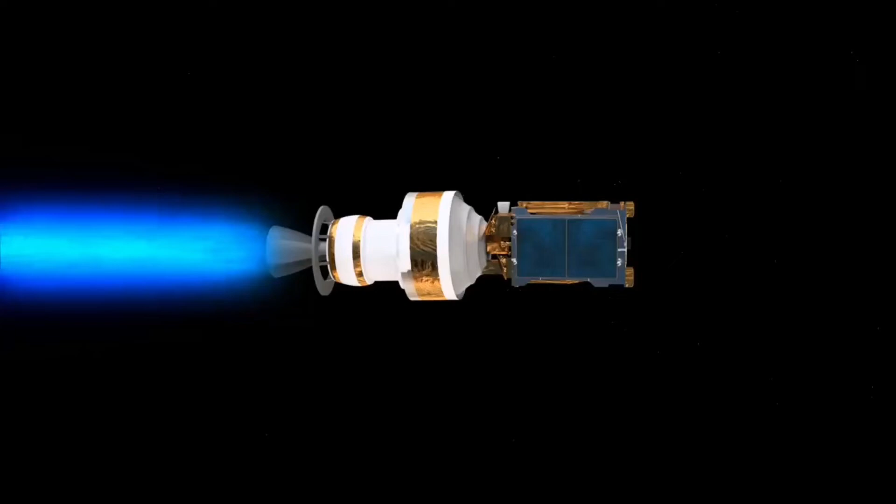Hello, good day. So on this part of this video, I will be discussing with you the basic concepts related to geometric geodesy as preparation for geodetic control networks. So as we proceed, let us first know what a geodetic control network is. So how is geometric geodesy related to geodetic control networks?

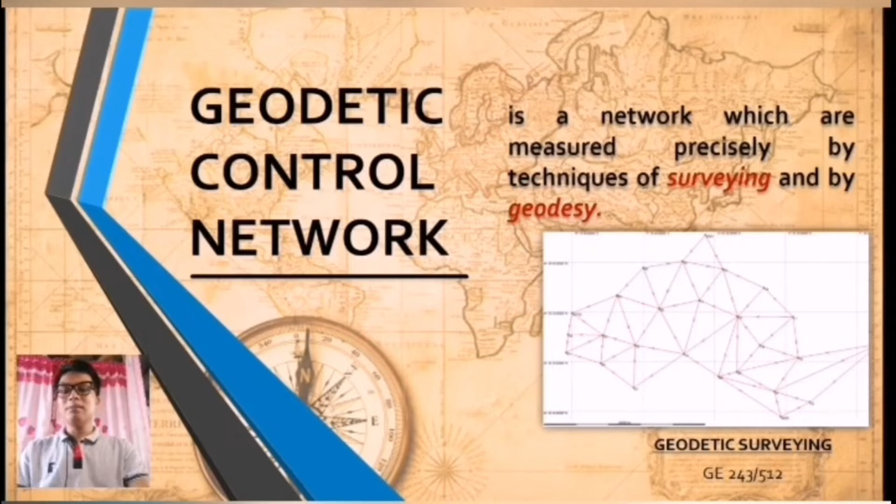So geodetic control networks are often called control networks, geodetic control points, or reference points. So it's a network which is measured precisely by techniques of surveying and geodesy. So in that part, a network is measured precisely by techniques of geodesy. So geodetic control networks provide us with control points given in the same reference system or coordinate system.

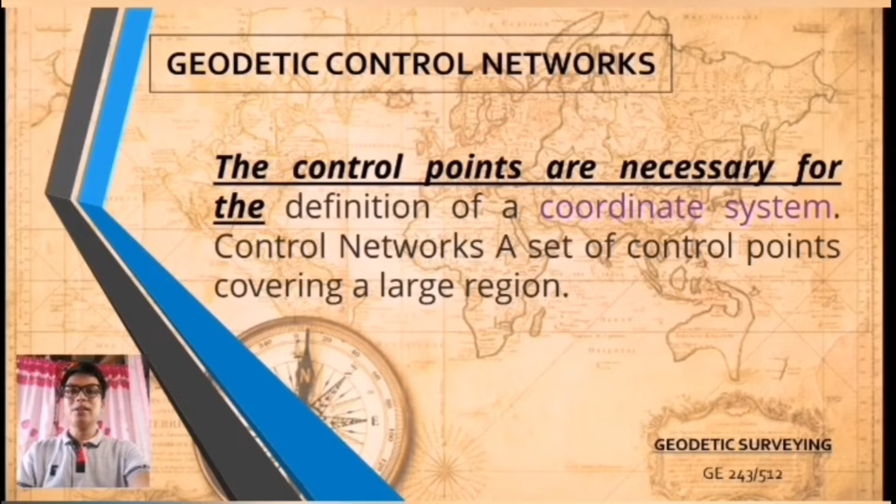So the positions, or so-called coordinates, of these points are determined using geodetic observations in an appropriate frame. So these geodetic observations include the branches of geodesy. So these control points are necessary for the definitions of coordinate systems. So control networks are a set of control points covering a large region. This coordinate system consists of two, which are horizontal coordinates and vertical coordinates.

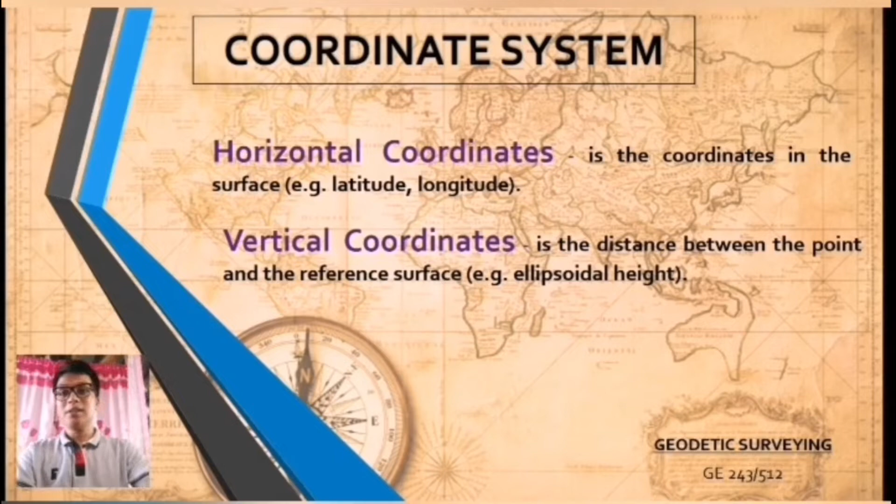So these horizontal coordinates are coordinates on the surface, such as latitudes and longitudes of points, while vertical coordinates are the distance between the points and the reference surface, or the ellipsoidal height. So that is what we call a 3D coordinate system. Now, where does geodesy come in?

So first, let us recall, geodesy is the discipline that deals with the measurement and representation of the Earth, including its gravity field, in a three-dimensional time-varying space. So geodesy relies on trilateration, leveling, satellite observations, or gravimetric observations. So since geodetic control networks are points, reference points, we need geometry, right? Hence the word geometric itself.

So geometric geodesy is concerned with describing locations in terms of geometry. Since the shape of the Earth is ellipsoidal, not a perfect sphere or flat, coordinate systems are one of the primary products of geometric geodesy. So that's why geometric geodesy is very important in preparation for geodetic control networks. So I hope that you understand.

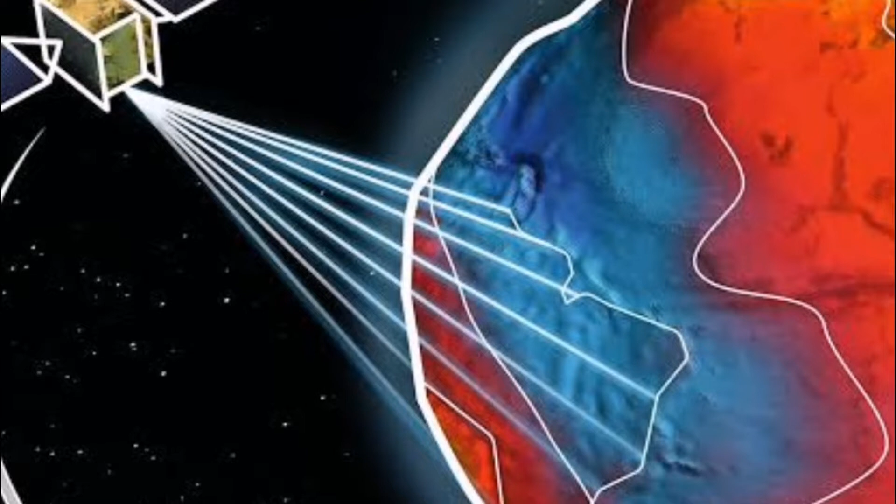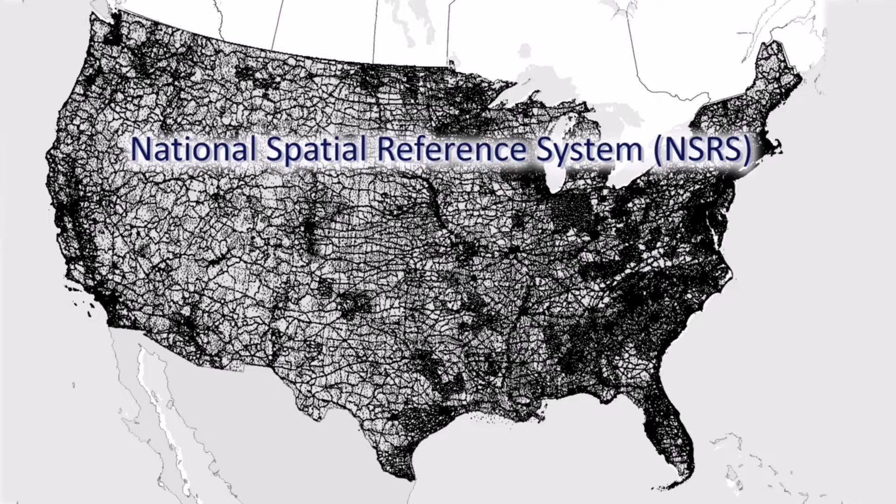When beginning most surveying and mapping projects, you are trying to find the coordinates of an unknown point or points. So you need to start at a place where the coordinates are known. Such starting points are called your project control. Using project control that has coordinates from the National Spatial Reference System, or the NSRS, ensures consistency with other surveys and maps that also use the NSRS, so that when maps are created, property boundaries determined, and roads planned, everything matches up.

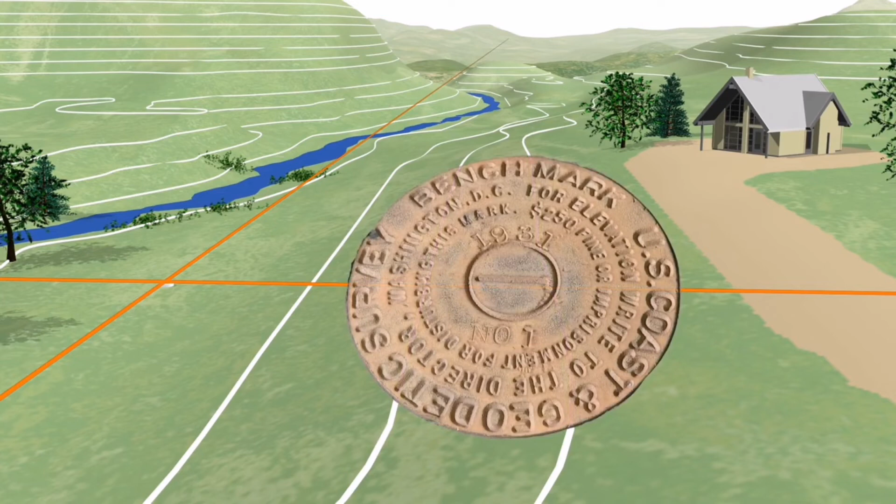For decades, surveyors relied primarily on passive control marks to tie into the NSRS. Passive control marks are usually some physical object, often a metal disc or rod installed in the ground. They are called passive because they can't alert you to their movement, and their coordinates may not be checked and updated for years or even decades. Over 800,000 passive control marks were set across the country, generally by the federal government, to build the NSRS.

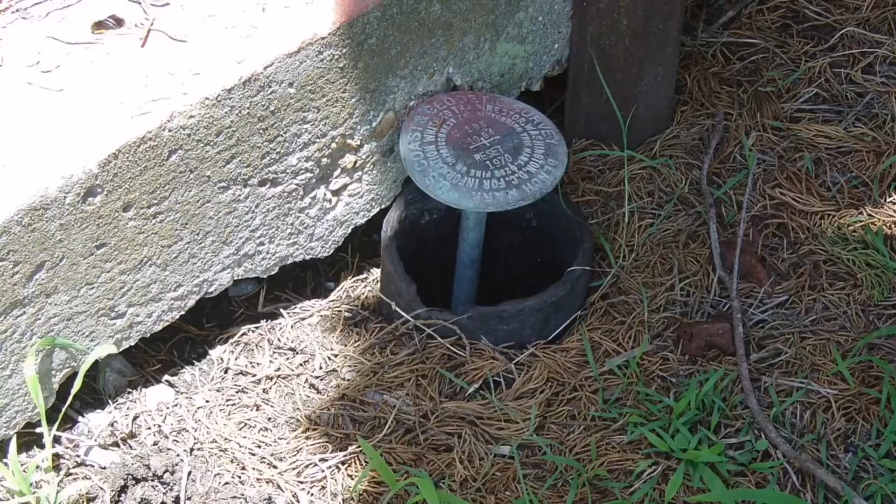Over the years, however, many marks have been disturbed, damaged, or destroyed. The coordinates for many others are no longer valid due to earthquakes, subsidence, or other crustal motion. For these reasons, you should always check a mark's coordinates before using it as control, and there may not even be a valid mark in your area of interest.

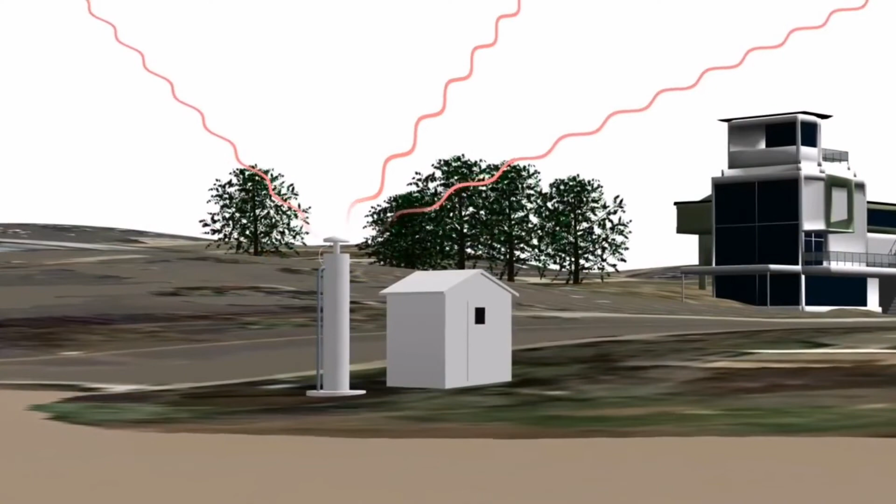Today, instead of marks in the ground, people are using permanently installed Global Positioning System, GPS, and other Global Navigation Satellite Systems, GNSS, receivers as active control. These receivers are called active because they are always collecting satellite information which tells us if they have moved, and if so, how much. You can utilize active control by accessing data from a nationwide network of continuously operating GPS reference stations, or CORS, to compute an up-to-date position in the NSRS.

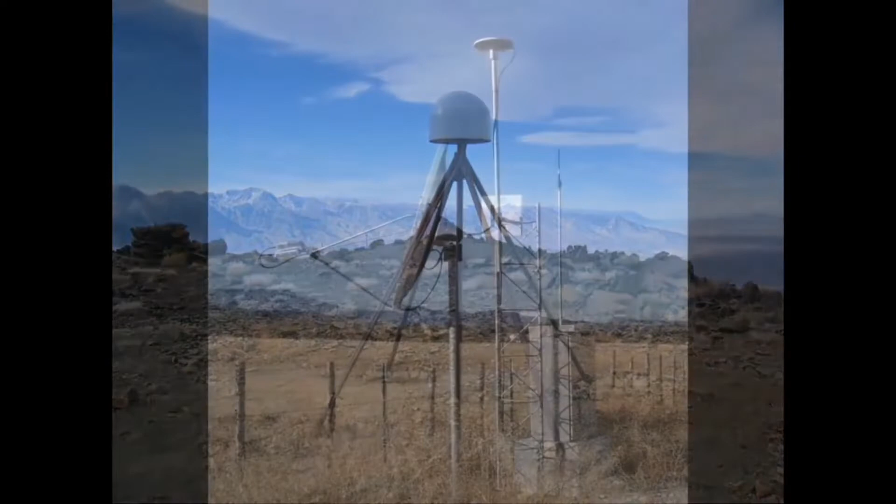CORS act as your known points to help you establish coordinates on unknown points. Each CORS includes a highly accurate receiver that constantly collects radio signals broadcast by GPS and other GNSS satellites, allowing the coordinates to remain up to date. NOAA works with many partners to manage a network of several thousand CORS, which are located in secure areas to ensure their longevity. CORS coordinates, accessed via the Internet, are validated daily and updated in the event of land movement.

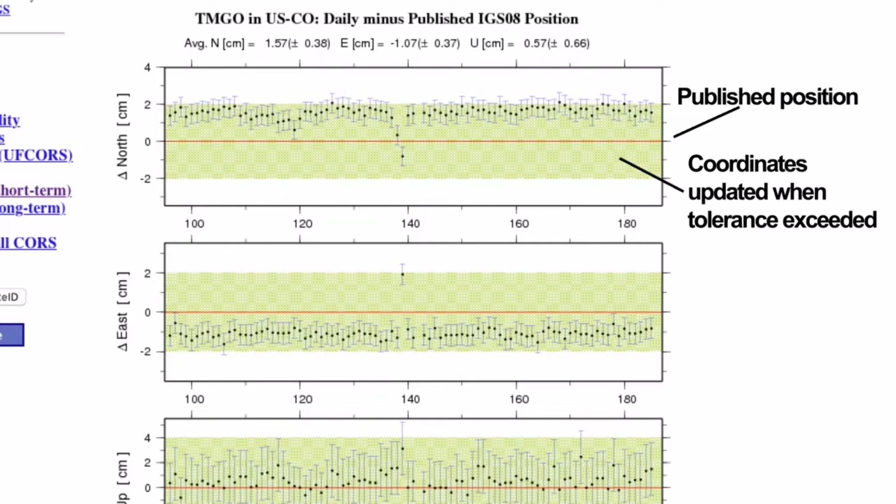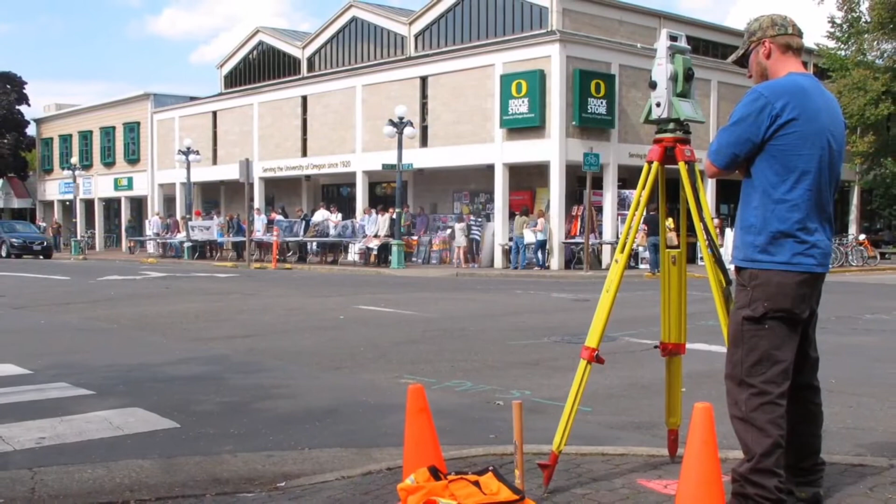This is a very different approach than passive control, where coordinates may not be checked for years. Using passive control requires you to start your survey from an existing physical point, which you must find and occupy with surveying equipment. Conversely, users have no need to physically visit a CORS site, and in fact can use CORS from hundreds of kilometers away from their survey site.

While passive control marks will continue to play an important role in the mapping community, making use of CORS and GPS allows you to keep up with this dynamic and changing world and start your survey almost anywhere.

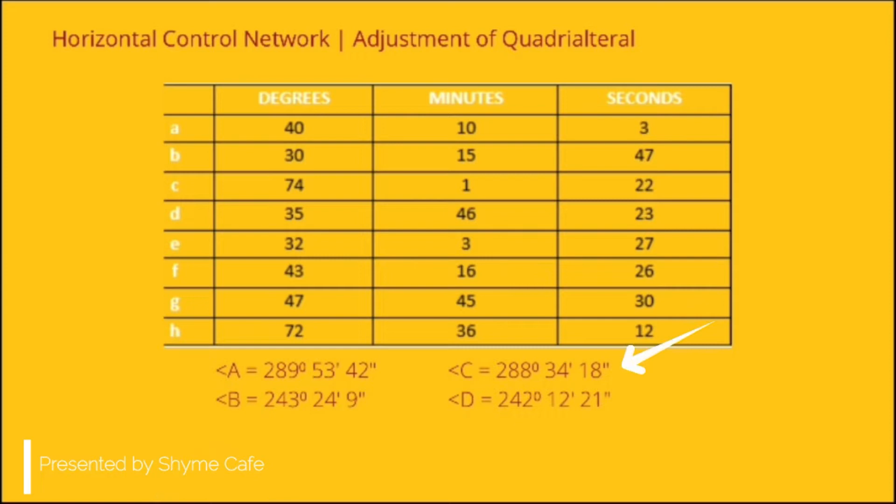So we have here the solution. The first adjustment is the station adjustment. In this adjustment, we need to make sure that the sum of the angles about each station should be equal to 360 degrees. If the sum of the angles, including the interior and exterior angle, is not equal to 360 degrees, correction is to be applied by determining the difference between the sum of the measured angles and 360 degrees. The resulting difference is then divided by the number of angles about the station, and the correction is to be added or subtracted to each angle.

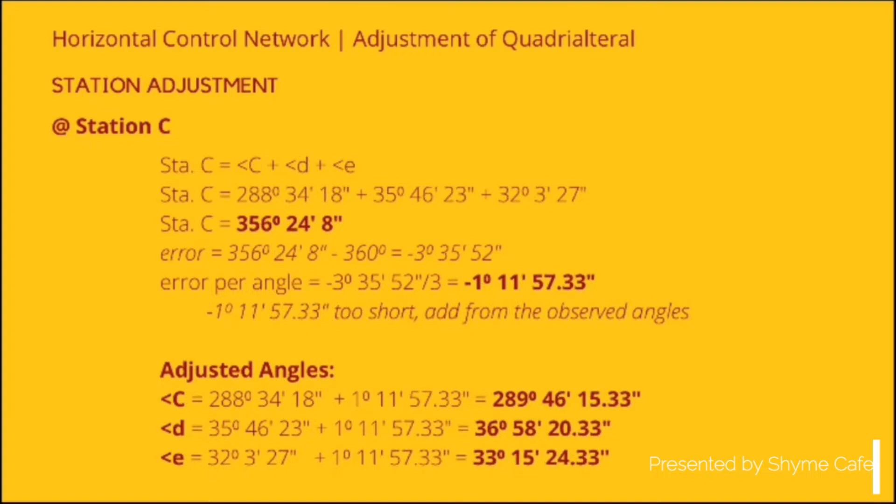So what we do in station A, we will also be doing the same process in station B, station C, and also in station D. So we have here the adjusted angles of the quadrilateral using the station adjustment.

Next adjustment is the figure adjustment. Figure adjustment is only performed after station adjustment because it uses the values obtained in the first adjustment. This adjustment requires that the sum of the angles for each triangle should be equal to 180 degrees. In the process of adjustment, the three angles of each triangle are added together and their sum is subtracted from 180 degrees. And same as the station adjustment, the correction is to be added or subtracted to each angle.

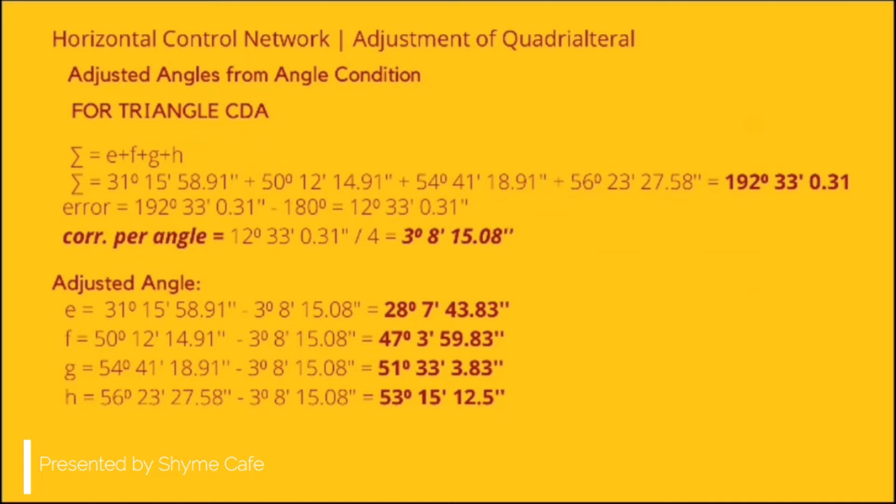So we have here the adjusted angles. Applying the correction to triangle ABC, to triangle CDA, to triangle BCD, and to triangle DAB, we have here the adjusted interior angles of the quadrilateral using the figure adjustment.

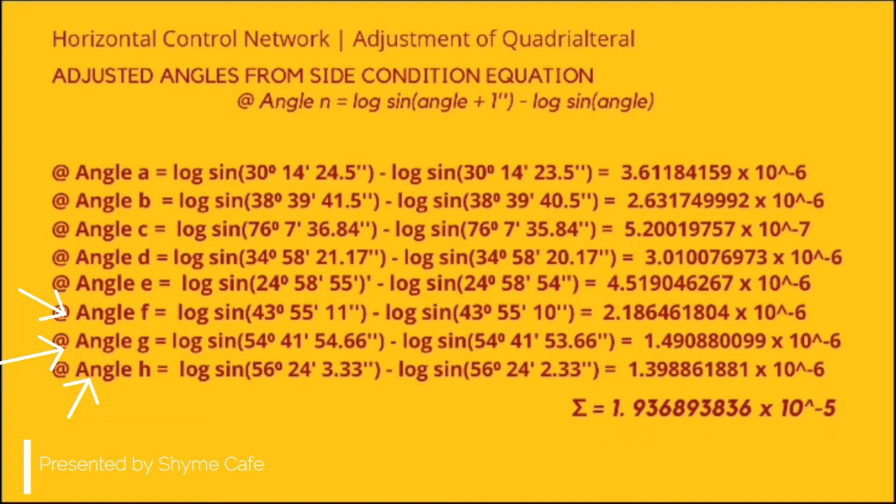Next is the side condition. In this, the sine of each angle should be proportional to the length of the opposite side of that triangle. So here, we use the formula log sine of the angle plus 1 second minus the log sine of the angle. And we get the summation of the angles that use the formula log sine of the angle plus 1 second, and also the sum of the angles that use the formula log sine of the angle.

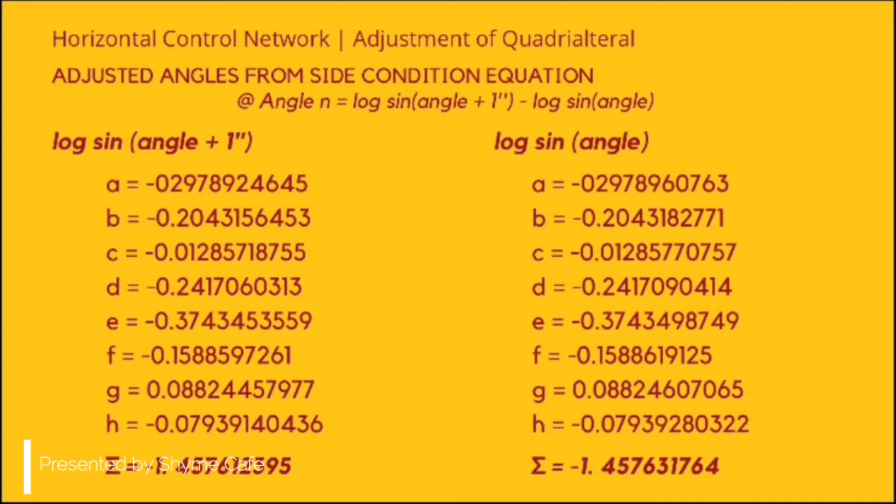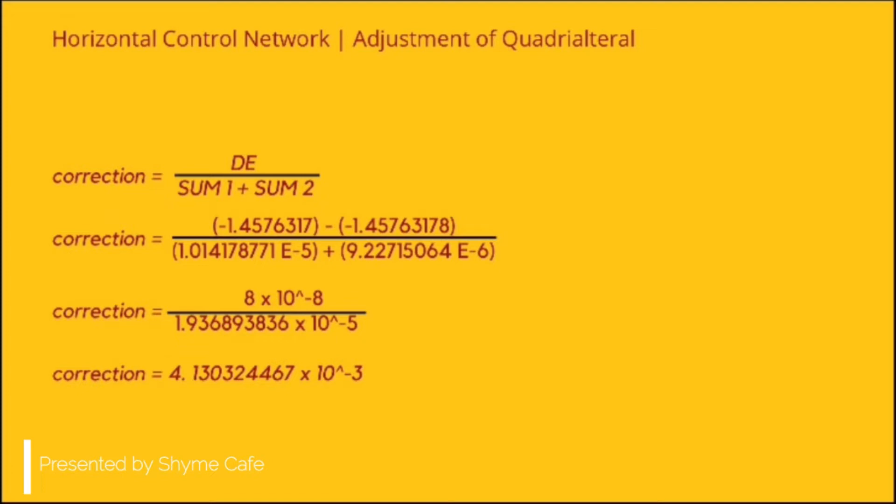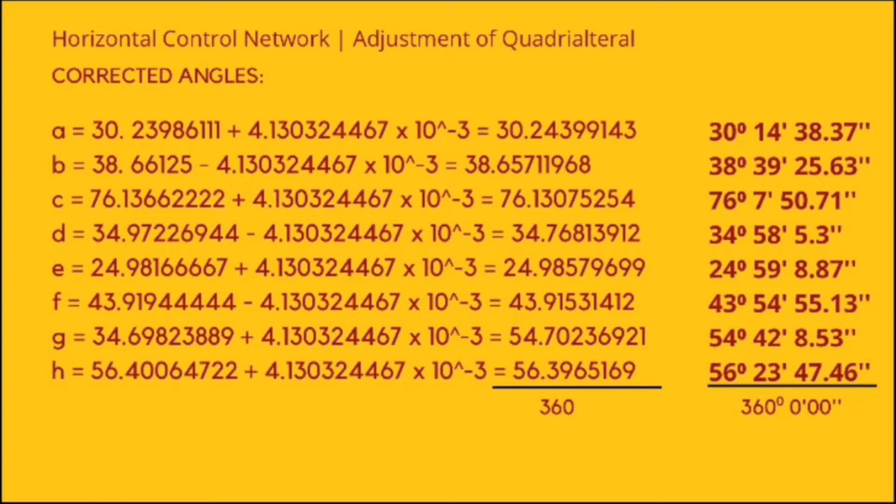The first thing we will do is compute the latitude and departure using this formula. Latitude is equivalent to length multiplied by the cosine of its bearing. So in our latitude AB, since it is due north, our bearing is equivalent to 0 degrees. So we just simply substitute the values, the length and the bearing. In our departure, the formula to be used is length multiplied by sine bearing. So 400 sine 0 degrees equals 0 meters.

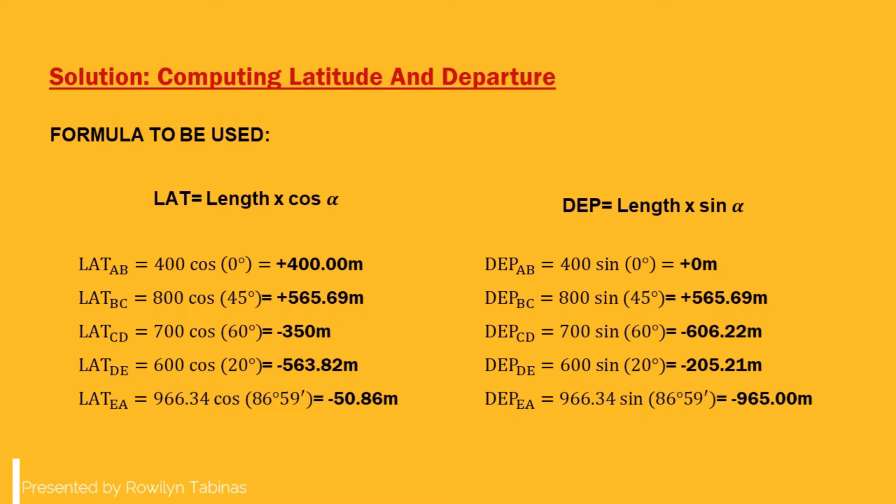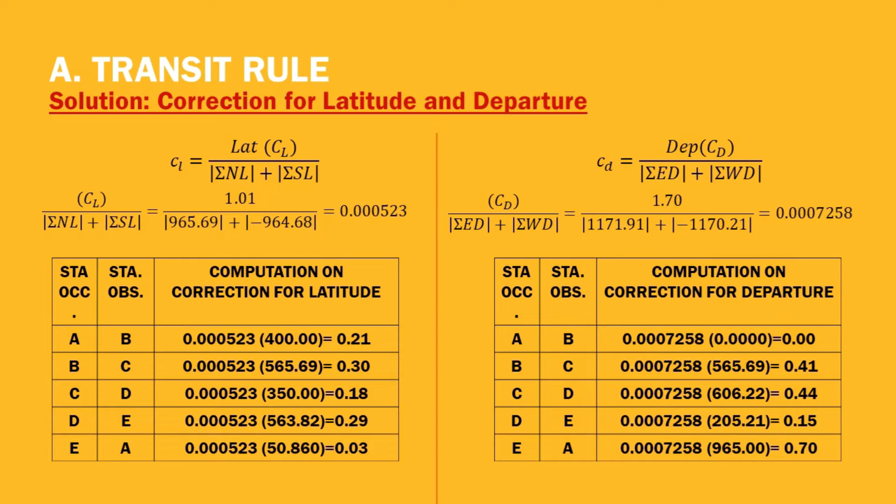And now adjusting latitude using transit rule. So we have the correction for latitude here in our third column. So in adjusting latitude, if it is from the north, you will subtract the correction, while if it is from the south, you will add the correction. So here is our adjusted latitude.

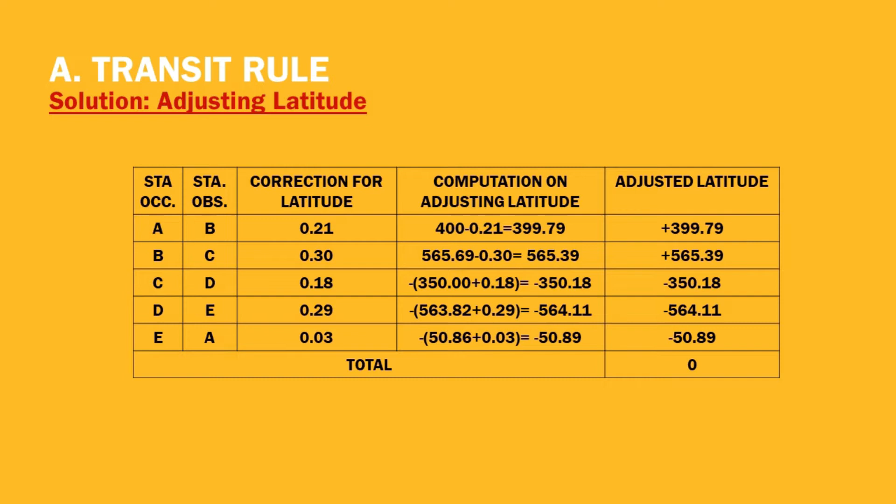In AB, our adjusted latitude is 399.79. In BC, we have 565.39. In CD, we have negative 350.18. In DE, we have negative 564.11. In EA, we have negative 50.89, and the total is equivalent to 0. So make sure that the total of the adjusted latitude will be 0.

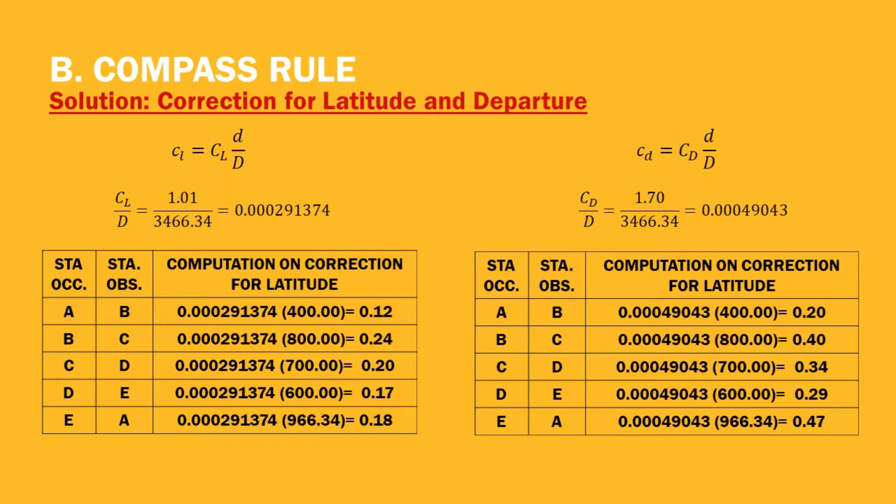So correction for departure, we have here our formula. Correction for departure is equal to the closure of error in departure multiplied to the distance all over D. So we first find the value of CD over D since this is constant, and you can just store it to your calculator, and then you can now multiply it to the distances of our stations. So you can see the computation in the table down below.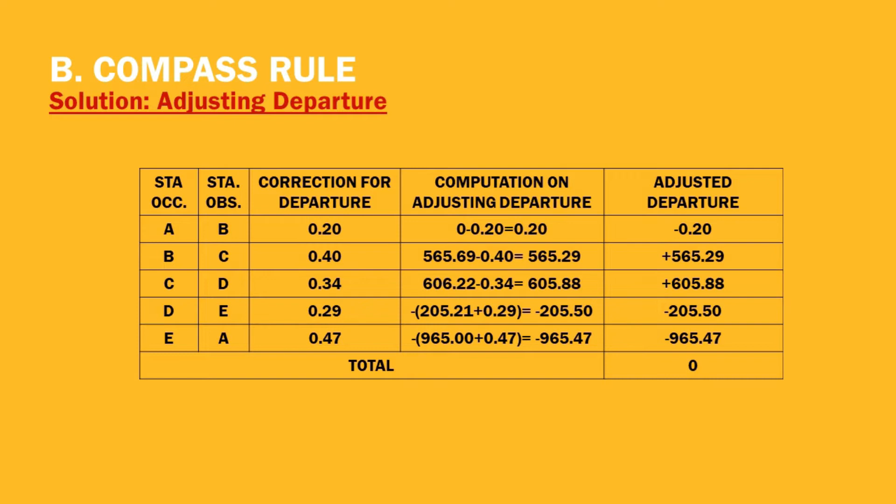For our third problem, we are going to compute the linear error of closure. So we have here our formula.

Linear error of closure is equivalent to the square root of the summation of error of closure in latitude squared plus summation of error of closure in departure squared. So we arrived at a value of 1.97740.

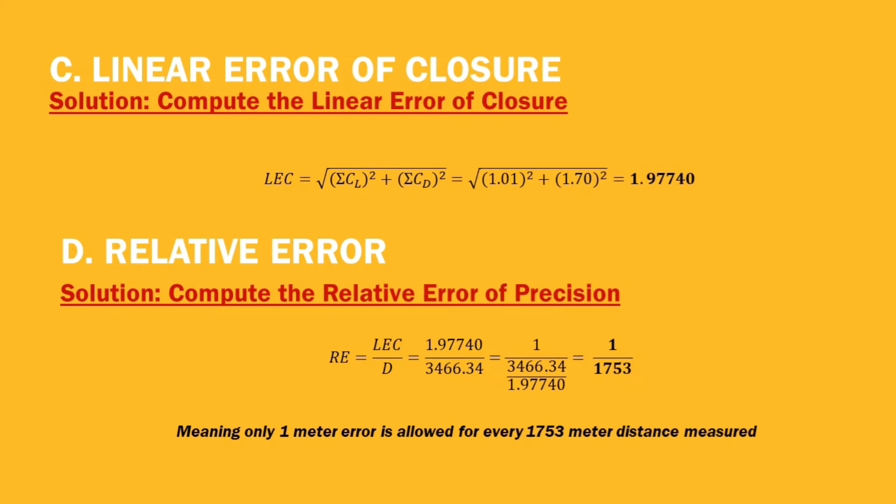For our last problem, we are going to compute the relative error of precision. So relative error is equivalent to the linear error of closure all over the total distance. So we have here 1 over 1,753. It means that only 1 meter error is allowed for every 1,753 meter distance measured.

Strength of figure. We have here the figure of the quadrilateral ABCD with its stations as well as its interior angles. We computed the number of geometric conditions to be satisfied in a given figure, or the C, by getting the sum of the angle conditions and the side conditions.

We have the expression of the angle condition, which is n prime minus s prime plus 1, and the expression for side condition is n minus 2s plus 3, wherein n is the total number of lines in the figure including the known line, s is the total number of stations, s prime is the number of occupied stations, and n prime is the number of lines observed in both directions including the fixed or known side of the given figure.

We also computed the factor for computing the strength of the figure, and this is equal to D minus C over D, wherein D is the number of directions observed, forward and back, and this does not include the fixed or known side of a given figure.

Next, we determine the strength of figure for each chain of triangles. We have here the first possible route, the triangle BDC and ADB, having the common side BD. We can solve δA and δB by computing the difference for 1 second that corresponds to the distance angles A and B of a triangle, following the formula log sine of the angle plus 1 second plus 10, minus log sine of the angle plus 10.

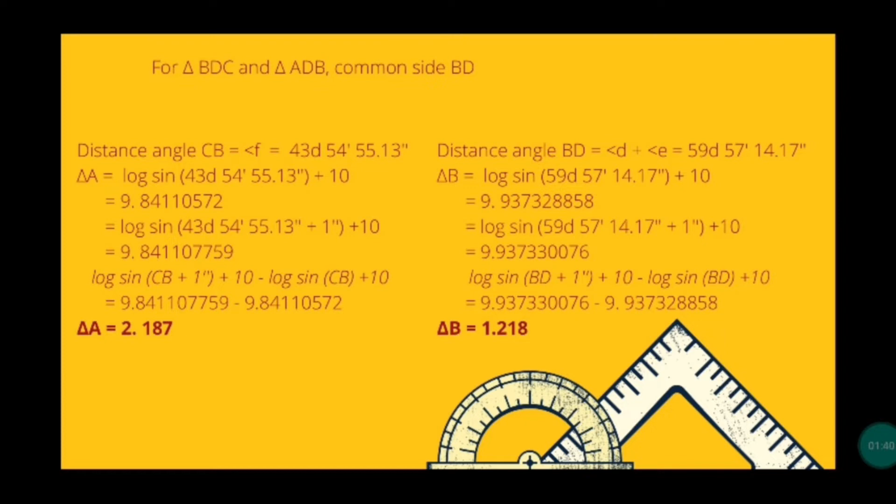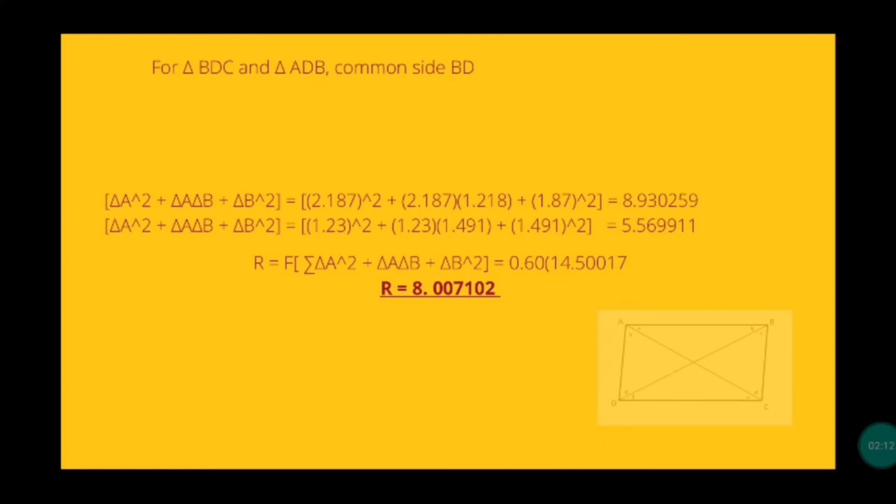And after, we computed R, or the relative strength of figure, using the formula F, the factor for computing the strength of figure, multiplied by the summation of values for the chain of triangles, δA squared plus δA times δB plus δB squared. So we got 8.007102 for the relative strength of figure for triangles BDC and ADB, BD as the common side.

So what we did for triangles BDC and ADB, BD as the common side, we will also do the same process for triangles CDA and DAB, DA as the common side, also for triangles CBD and CBA, BC as the common side, as well as for triangles CDA and ACB, AC as the common side, in determining the relative strength of figure.

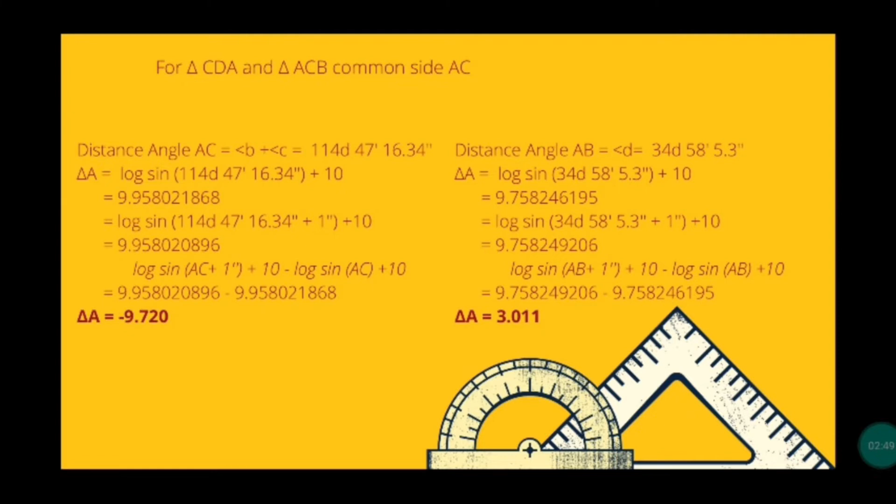And therefore, for the possible routes, the strongest chain consists of triangle BDC and triangle ADB, BD as the common side, since it gives the lowest value of relative strength of figure. And the relative strength of the quadrilateral ABCD is 8.007102.

In this part of this lecture series, we'll be tackling the spherical excess and how to compute it. When the triangulation network has long sides, theoretically, it should be solved as a series of spherical triangles. To aid our understanding better, we have here a sample problem. The problem goes this way.

The interior angles in a triangle XYZ are X equals 62 degrees, 20 minutes, and 10 seconds, Y equals 59 degrees, 50 minutes, and 30 seconds, and Z equals 57 degrees, 49 minutes, and 35 seconds. Side XY, or side z, has a length of 35,820.65 meters. Assuming the average radius of curvature to be 6,383.393 kilometers, compute the spherical excess and the corrected interior angles of the triangle.

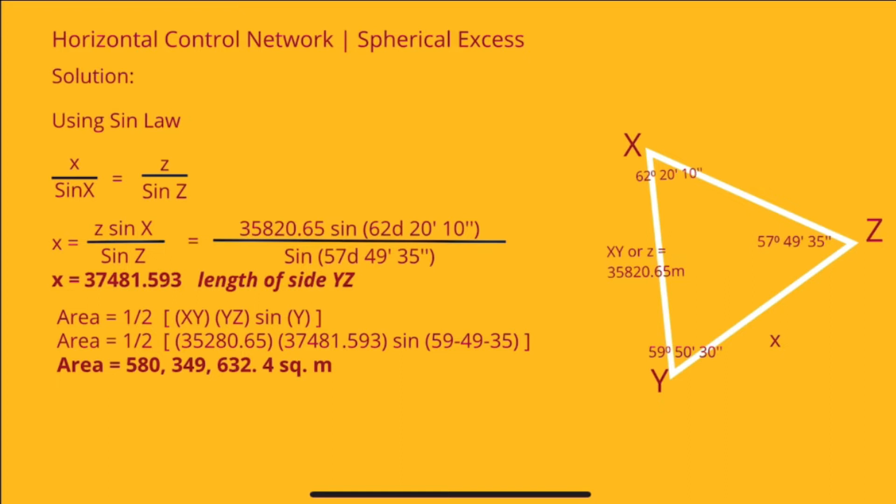So 1/2 of xy times yz sine angle y is the area. Substitute the values and we would arrive at the answer. Since we now have the area, we can now compute for the spherical excess. Using the formula, spherical excess is equal to area over r squared, the radius, sine 1 second. Substituting the values, we would arrive at the answer of 2.94 seconds.

And the correction to be applied to the angles given is spherical excess divided by 3, which is the number of angles in a triangle. So that would give us 0.98 seconds. Since the spherical excess is positive, that would mean too long, we need to subtract this correction from the given values. And with that, we would arrive at our corrected angles.

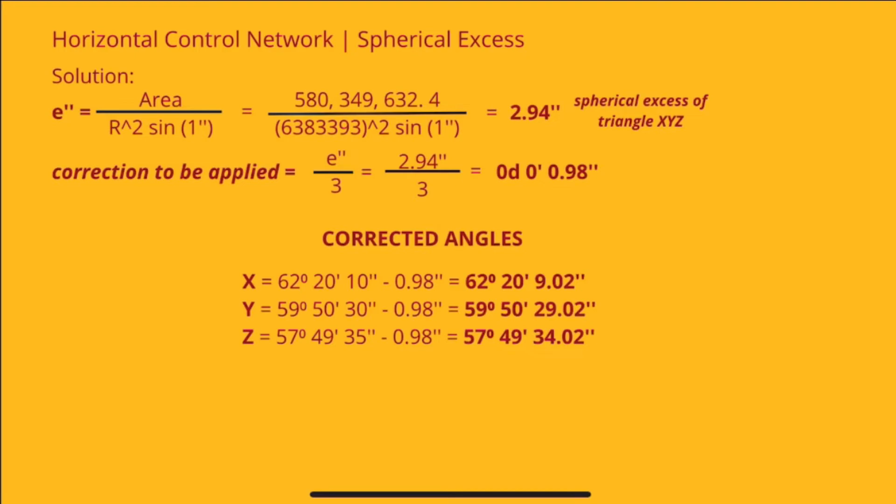Vertical control network sample problem number 2. We have here the problem. Compute the difference in elevation between BM1 and BM2 if the backsight reading of BM1 is 2.36 meter at an elevation of 153.2 meter above mean sea level, and the foresight reading of the same instrument setup to BM2 is 6.546 meter. So we have here the given, the backsight of BM1 which is equal to 2.36, the foresight of BM2 which is 6.546, and the elevation of BM1 which is 153.2.

So we are required to compute for the difference in elevation between BM1 and BM2. And here is the solution. Since the elevation of BM1 is already given, we have to solve the height of instrument by getting the sum of the elevation and the backsight. And after that, we can then determine the elevation of BM2 by subtracting the foresight of BM2 from the height of the instrument. And to get the difference in elevation between BM1 and BM2, we just simply subtract their elevations.

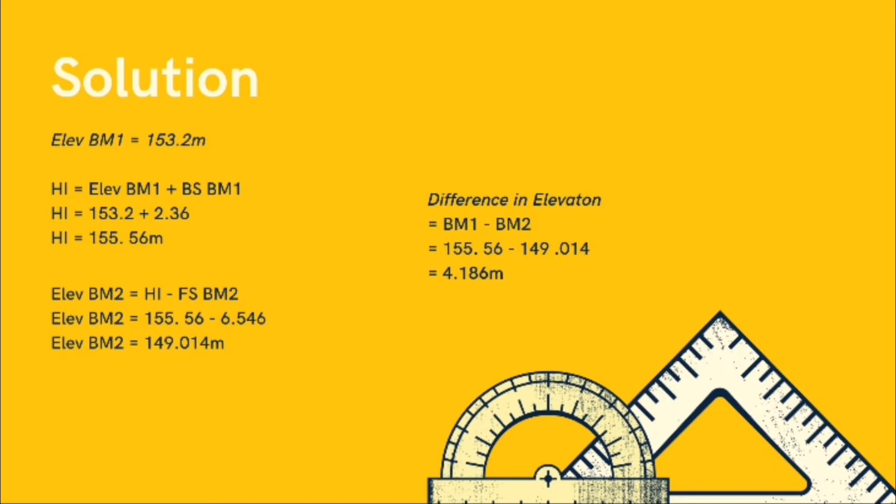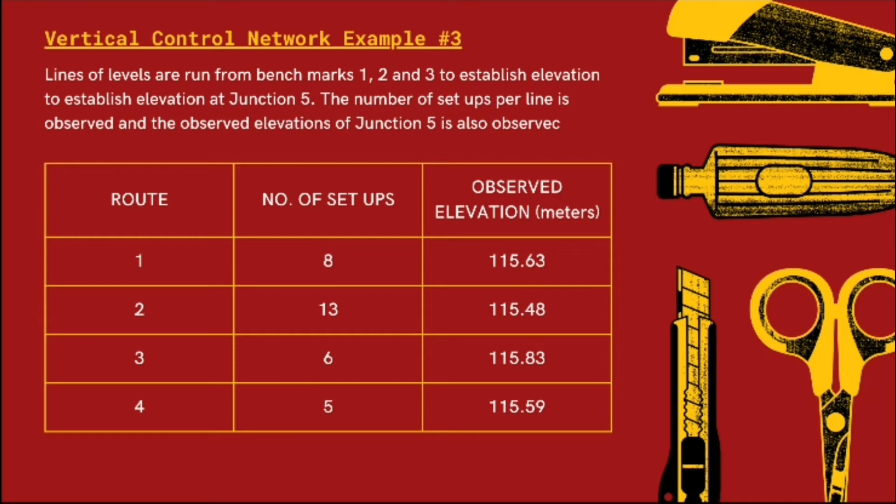Vertical control network example problem number 3. We have here the problem. Lines of levels are run from benchmarks 1, 2, and 3 to establish elevation at junction 5. The number of setups per line is observed, and the observed elevation of junction 5 was also observed. We have here the given of the problem inside the table. For the first column, we have the routes, for the second column, we have the number of setups per route, and for the last column, we have the observed elevation in meters per route. So, in the problem, we are required to compute for the least square estimate for the elevation at junction 5.

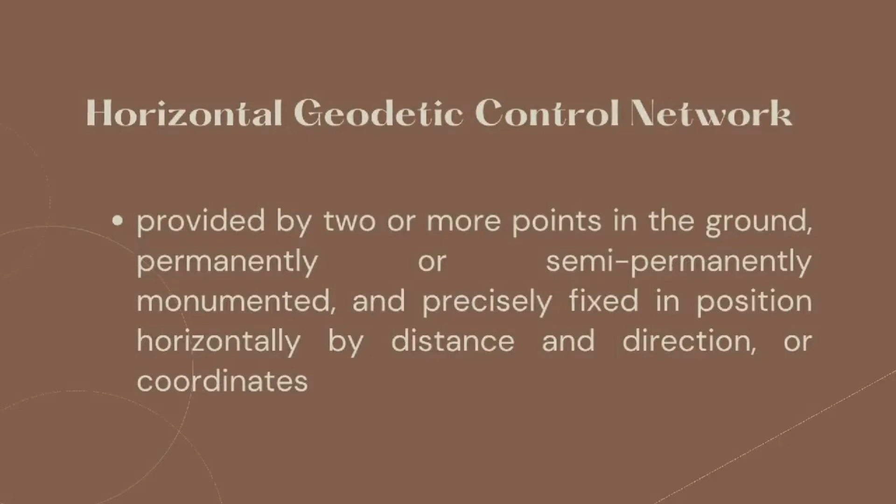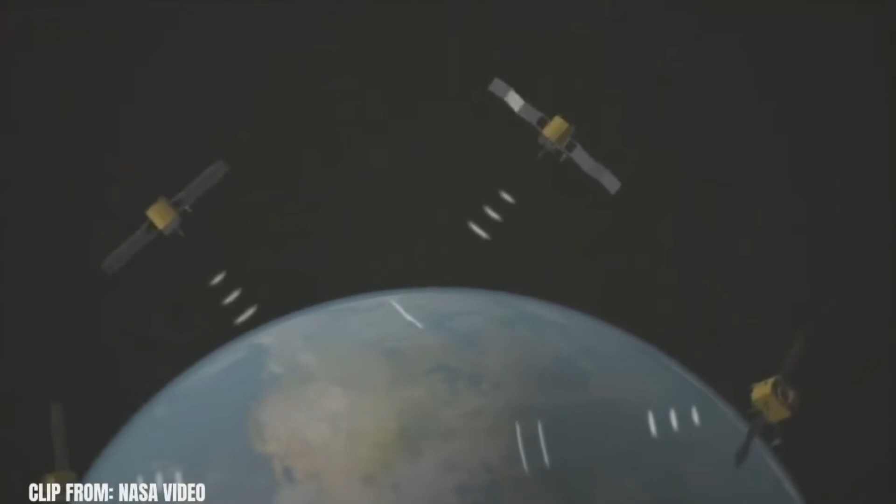The horizontal control network is provided by two or more points on the ground, permanently or semi-permanently monumented and precisely fixed in position horizontally by distance and direction or coordinates. It is usually established by performing triangulation, trilateration, traversing, or by the use of GNSS or Global Navigation Satellite System. So when we say Global Navigation Satellite System, it is the standard generic term for satellite navigation systems that provide autonomous geospatial positioning with global coverage.

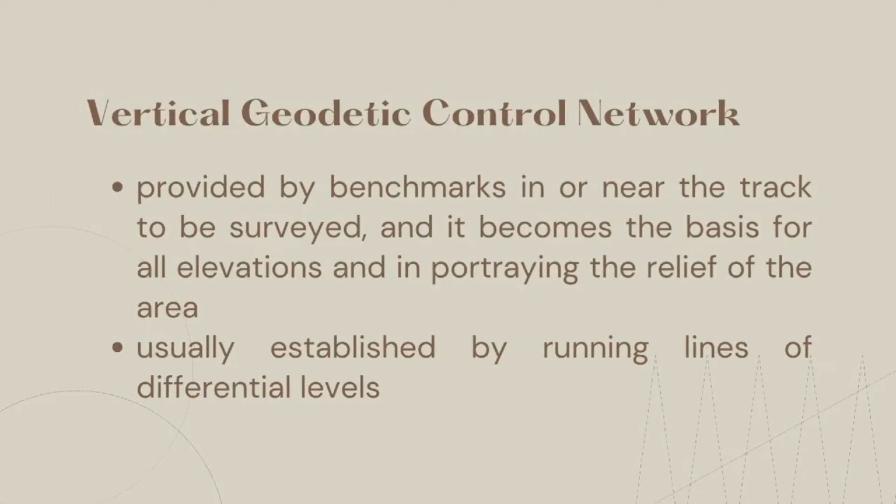The vertical control network is provided by benchmarks in or near the tract to be surveyed, and it becomes the basis for all elevations and in portraying the relief of the area. It is usually established by running lines of differential levels. GPS surveying may also be used, but elevations must be converted to orthometric heights first in order to be acceptable.

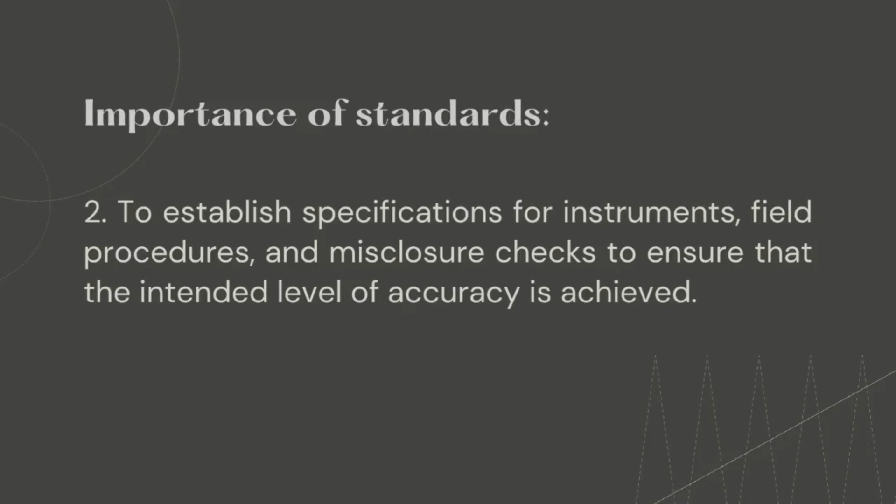Importance of standards. First, to provide a uniform set of standards specifying minimum acceptable accuracies of control surveys for various purposes. Second, to establish specifications for instruments, field procedures, and misclosure checks to ensure that the intended level of accuracy is achieved. Factors affecting accuracy.

First, type and condition of equipment. Second, field procedure. And last, capabilities of survey personnel.

In Article 7, Survey Accuracy, Section 28, Survey Accuracy for Geodetic Control, it is said that for the purpose of the revised regulations on land surveys, the control survey accuracy shall be as follows.

In first order accuracy, the relative error is 1 over 100,000, the linear error 1 cm per kilometer, nominal space 50 km, and vertical accuracy 4.80 mm multiplied by the square root of the distance.

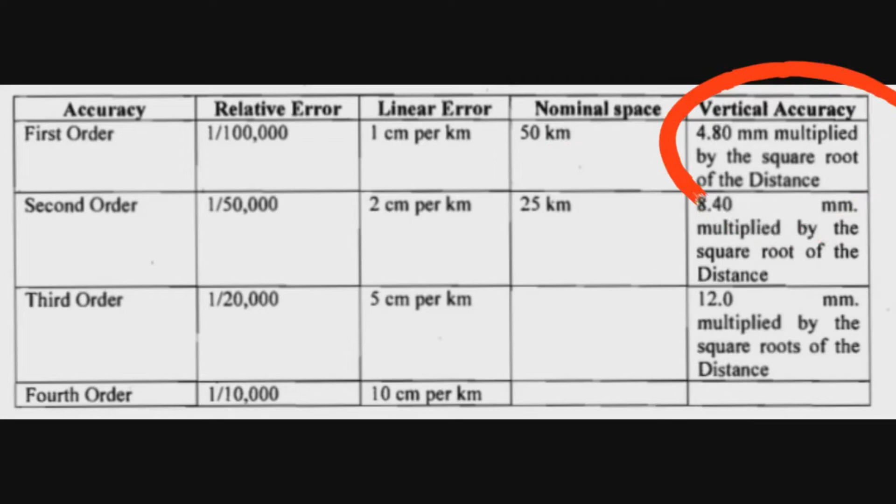In second order, the relative error is 1 over 50,000, the linear error 2 cm per kilometer, nominal space 25 km, vertical accuracy 8.40 mm multiplied by the square root of the distance.

Third order, the relative error is 1 over 20,000, linear error 5 cm per kilometer, and vertical accuracy 12.0 mm multiplied by the square root of the distance.

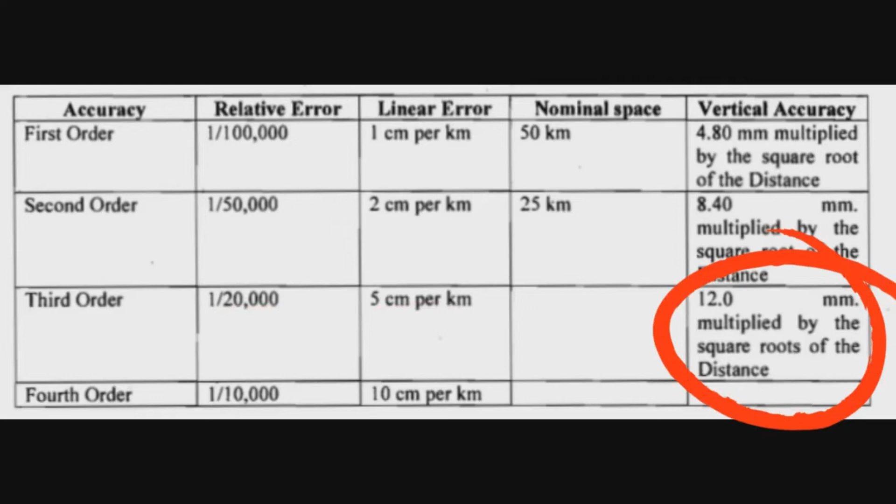The last order, fourth order, the relative error is 1 over 10,000, linear error is 10 cm per kilometer.

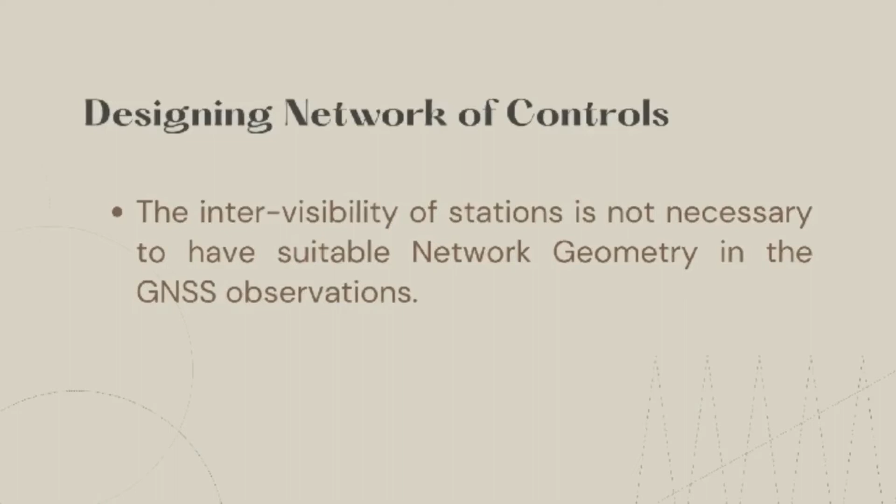In designing a network of controls, intervisibility of stations is not necessary to have a good network geometry in GNSS observations. However, in preparing the network design, the points selected must be able to be occupied, located on stable ground, and not affected by any construction activities in the near future.

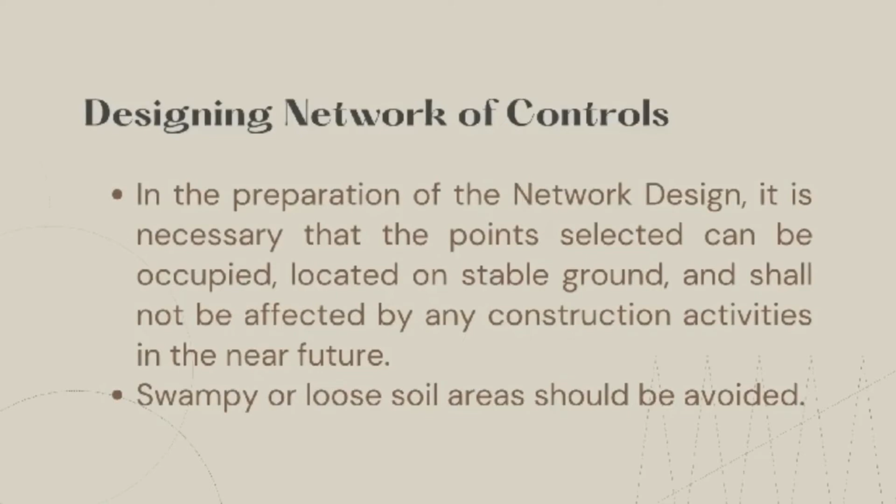Swampy or loose soil areas should be avoided. For the map of the project site, the available NAMRIA topographic map of the area shall be used as the base map.

All the fixed controls or old control points, based on available records, shall be plotted. The points to be established shall be approximately plotted on the selected locations. Caution shall be taken to scale the map correctly.

The distance between points is an important factor. Each station shall be numbered properly. The network design's final map may be modified upon the conduct of field reconnaissance.

Conditions on the network design: the lines connecting the control points within the network should create closed polygons with the minimum number of sides, such as triangles, that will create a rigid network.

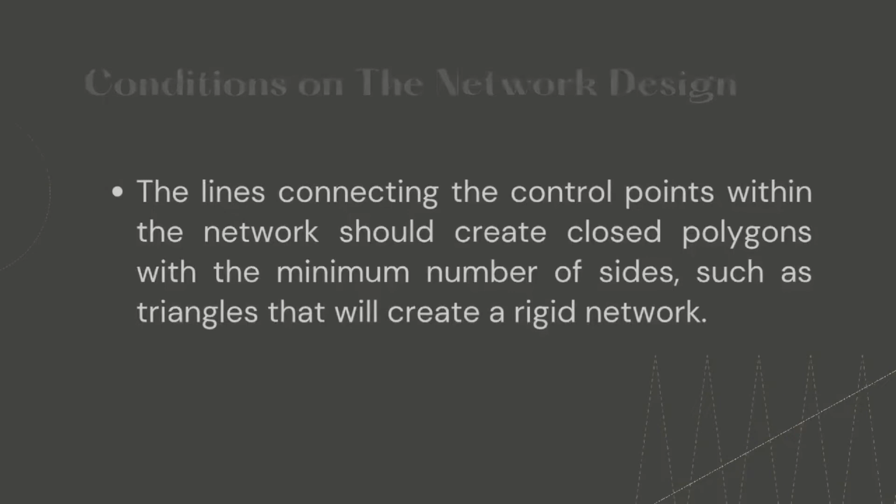The network shall be designed so that all stations or points included have at least 3 known PRS-92 control points. The design network should have an adequate amount of redundancy, with an optimal number of known points included.

It should have as many cross ties and repeated measurements as possible. Lastly, field observations shall be timed when the position dilution of precision, or PDOP, is low.

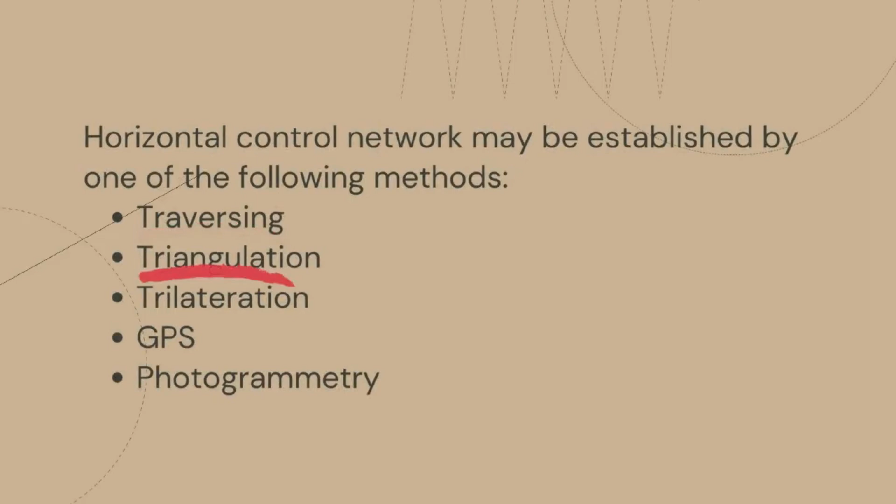Horizontal control network and its methods. A horizontal control network may be established by one of the following methods: traversing, triangulation, trilateration, GPS, and photogrammetry.

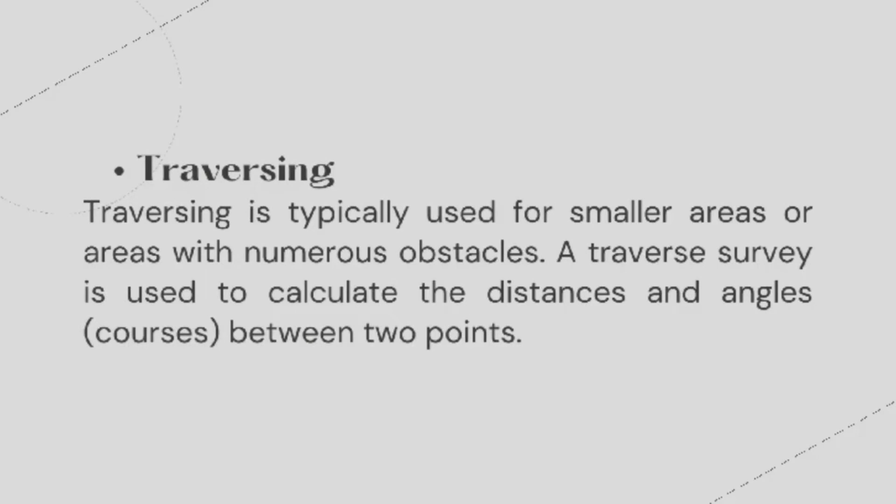Traversing is typically used for smaller areas or areas with numerous obstacles. A traverse survey is used to calculate the distances and angles or courses between two points. There are two types of traverse: closed traverse and open traverse.

Triangulation is a method of measuring angles on a network of triangles using a theodolite. The distance between control points is determined by the purpose and can range up to tens of kilometers.

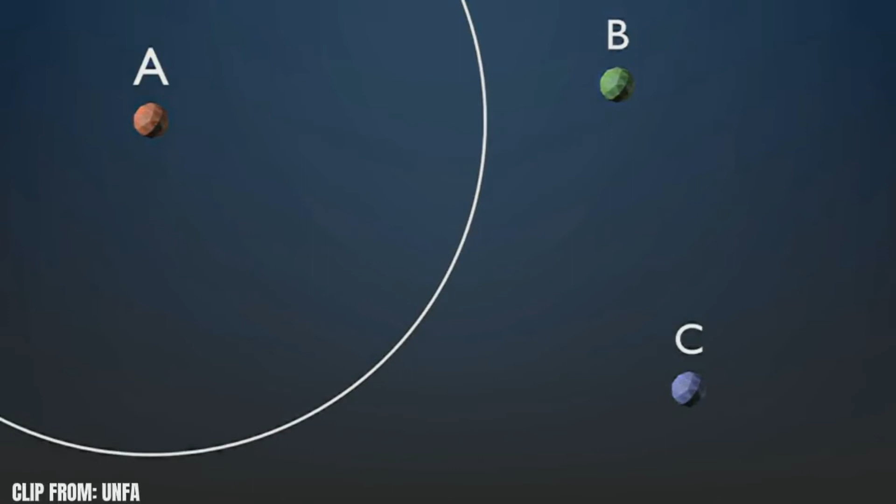Trilateration is a simplified method of triangulation. The total time consumption of the process can be reduced in some cases, for example when using EDM over long distances. The Global Positioning System, known as GPS, is similar in some ways to trilateration and EDM previously discussed, except that the known positions are now the GPS satellites and their orbits, 20,000 kilometers in space.

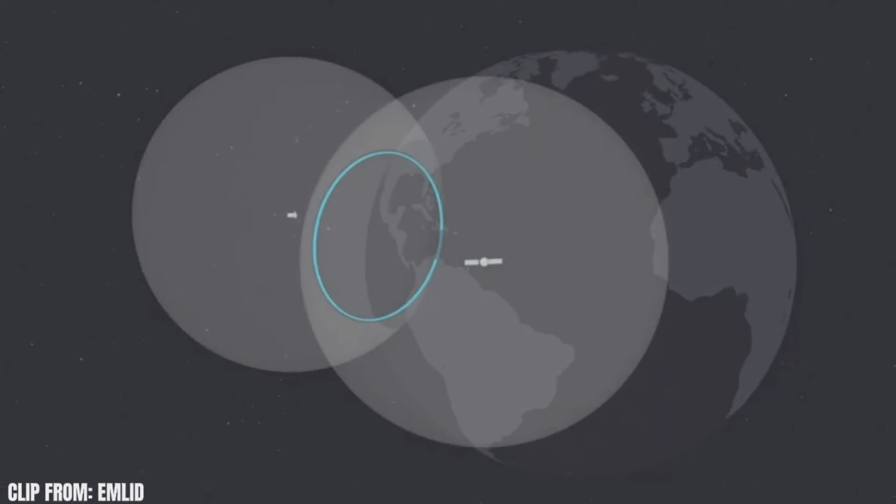The equipment and calculations are extremely complex, but for the user, the process is generally very simple.

Photogrammetry, as its name implies, is a three-dimensional coordinate measuring technique that uses photographs as the fundamental medium for metrology or measurement. The fundamental principle used in photogrammetry is triangulation.

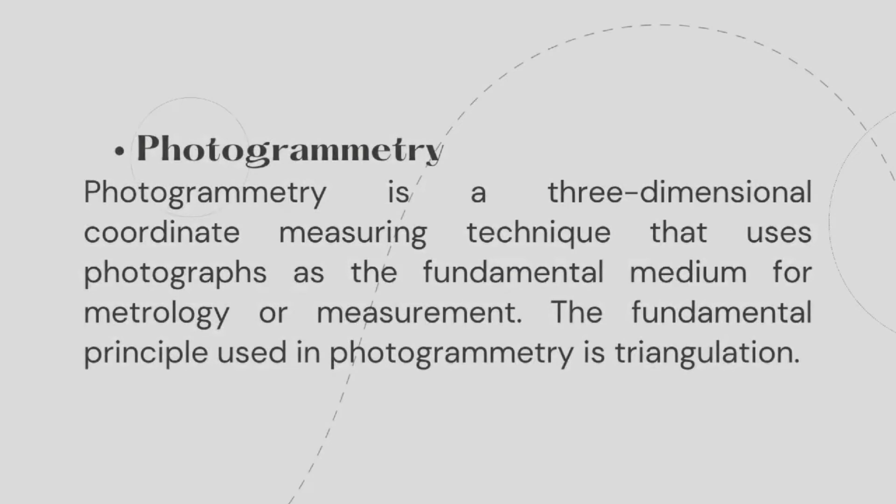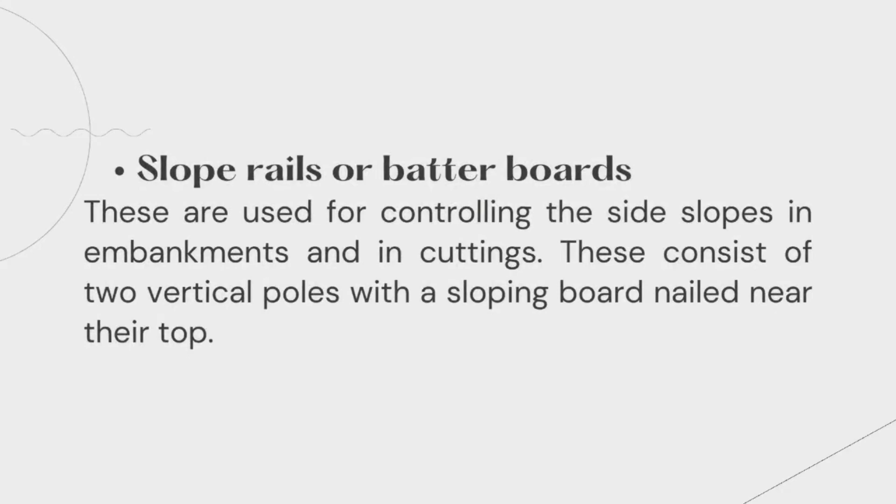A sight rail consists of a horizontal cross piece nailed to a single upright or pair of uprights driven into the ground. Third is slope rails or batter boards, used for controlling the side slopes in embankments and cuttings. These consist of two vertical poles with a sloping board nailed near their top.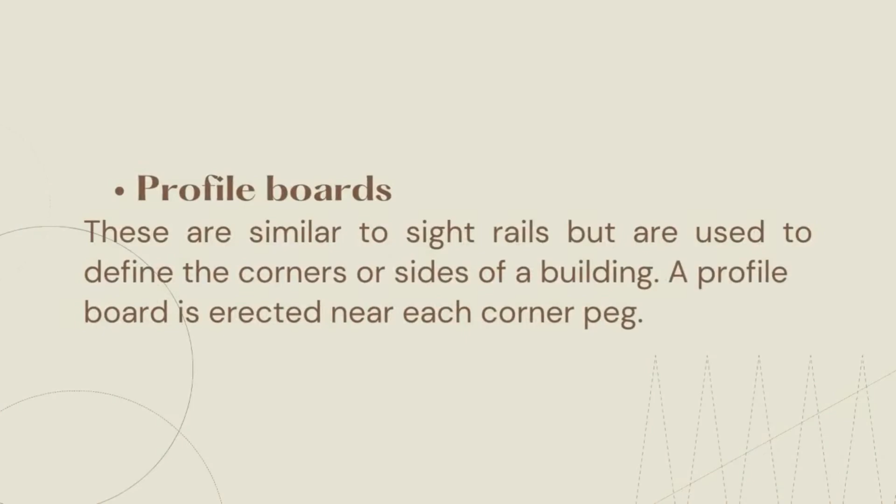The fourth is profile boards. These are similar to sight rails but are used to define the corners or sides of a building. A profile board is erected near each corner peg.

Good day! For this video, we will be tackling the accepted standards of accuracy and specifications for geodetic control network establishment and operating geodetic control survey technology. The reporters for this video are Charlene Joyce Samson, Micaela B. Caguicla, and John Patrick M. Casio.

First, we have Article 7, Survey Accuracy, from DENR Administrative Order Number 2007-29, the Revised Regulation on Land Survey. In Section 28, Control Surveys, for the purpose of this regulation and consistent with the adoption of new survey technologies, the control survey accuracy shall be as follows.

So the accuracy classifications are first order, second order, third, and fourth order. The relative error for the first order is 1 over 100,000, for the second order is 1 over 50,000, for the third order is 1 over 20,000, and lastly for the fourth order is 1 over 10,000.

The linear error for the first order is 1 cm per kilometer, for the second order is 2 cm per kilometer, the third order is 5 cm per kilometer, and for the fourth order is 10 cm per kilometer.

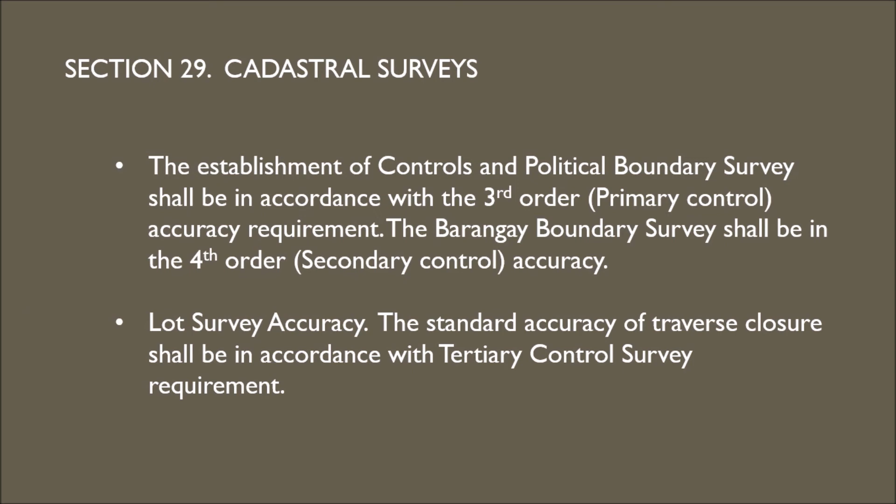In conducting isolated land surveys, the surveyor shall be guided by the following: for the original subdivision consolidation or consolidation-subdivision isolated survey, it shall be conducted using equipment and methods that will meet the tertiary control accuracy.

When conducting relocation or verification survey, the allowable position of error shall not exceed positive/negative 10 centimeters. However, the allowable difference in the area shall not exceed positive/negative 1 square meter for every 1 hectare.

In Section 31, for mineral land surveys, survey of mineral lands executed for mineral agreement or for other purposes pursuant to the Mining Act of 1995 shall be in the fourth order or the secondary control accuracy.

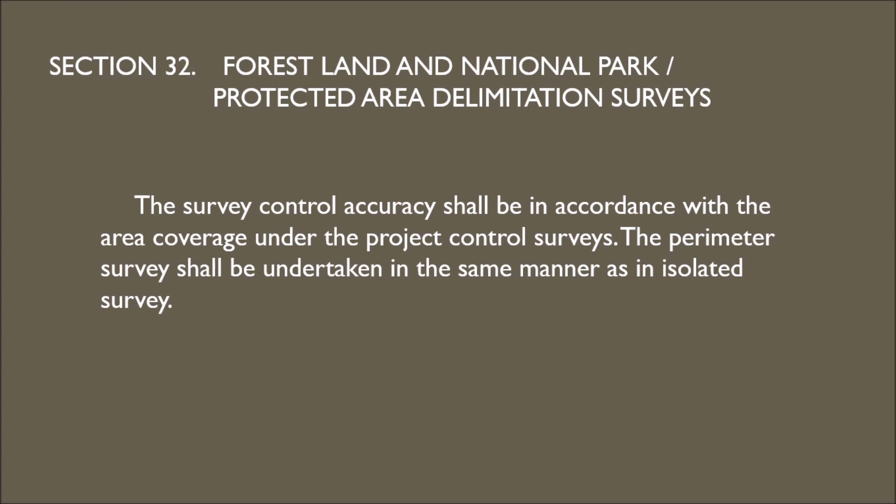Next, Section 32, for Forest Land and National Park or the Protected Area Delimitation Survey, the survey control accuracy shall be in accordance with the area coverage under the Project Control Survey, wherein the perimeter survey shall be undertaken in the same manner as in isolated survey.

Next, we have Section 10, Designing Network of Controls, from the adoption of the Manual on Land Survey Procedures. The intervisibility of stations is not necessary in order to have a good network geometry in the GNSS observations.

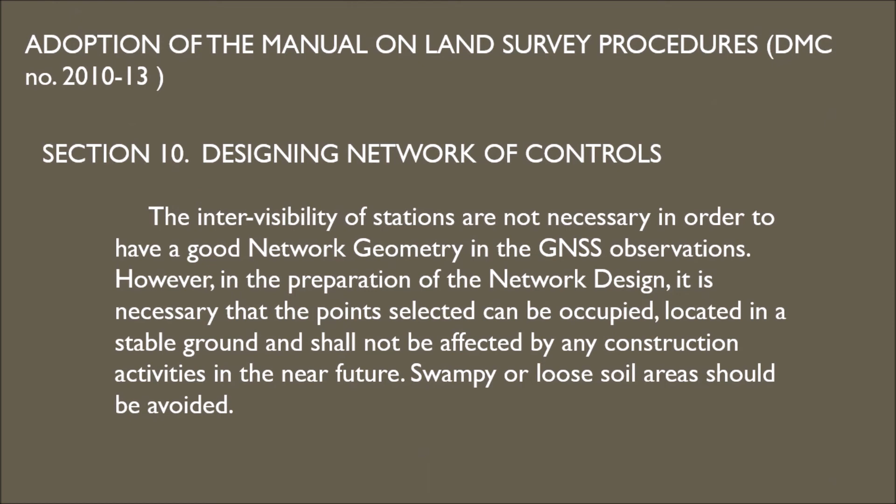However, in the preparation of the network design, it is necessary that the points selected can be occupied, located in a stable ground, and shall not be affected by any construction activities in the near future. Swampy or loose soil areas should be avoided.

Next, from Section 12, the following shall apply in the preparation of the map of the project site: first, the available NAMRIA topographic map of the area shall be used as base map; then all fixed controls or old control points based on available records shall be plotted; next, the points to be established shall be approximately plotted on the selected locations.

Caution shall be taken in order to scale the map correctly, and the distance between the points is an important factor. Each station shall be numbered in accordance with Section 16 of this manual, and the network design final map may be modified upon the conducted field reconnaissance.

Next, we have Section 13. Using the project site map, it shall be ascertained that the network design shall be made to conform to the following conditions.

These conditions are: first, the lines connecting the control points within the network should create closed polygons with the minimum number of sides, such as triangles, that will create a rigid network.

Next, the network shall be designed so that all the stations or points included therein should have at least 3 known PRS 92 control points.

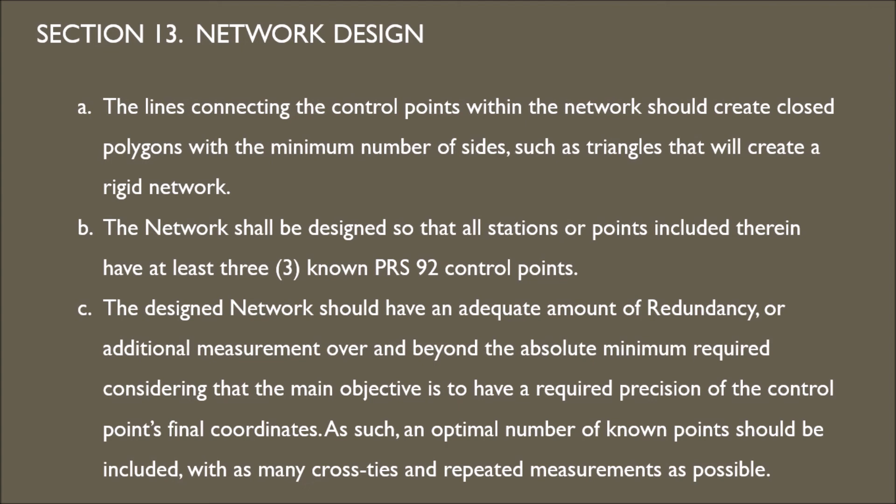The design network should have an adequate amount of redundancy, or additional measurement over and beyond the absolute minimum required, considering that the main objective is to achieve the required precision of the control point final coordinates, such as an optimal number of known points included, with as many cross ties and repeated measurements as possible.

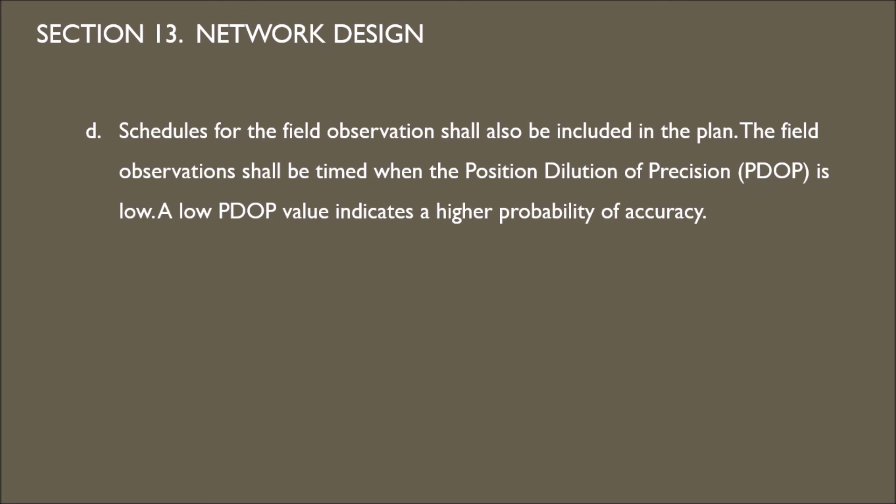Lastly, the schedule for the field observations shall also be included in the plan. The field observation shall be timed when the position dilution of precision, or PDOP, is low. A low PDOP value indicates a higher probability of accuracy.

Section 15, Geodetic Control Monument. The positions of reference points shall be defined and marked on the ground by a monument of permanent nature in the form of a square-based frustum.

Concrete monuments shall be fabricated with reinforced steel bar, 10 mm in diameter for vertical bars and 8 mm diameter for ties, and satisfying the requirements of Class A concrete specifications in the ratio of 1 to 2 to 4, or translated into a concrete mixture such as 1 cubic meter of cement, 2 cubic meters of sand, and 4 cubic meters of gravel, or in bags: 2 bags of cement, 4 bags of sand and 8 bags of gravel. Sand and gravel must be clean, free from dust, mud, or organic matter.

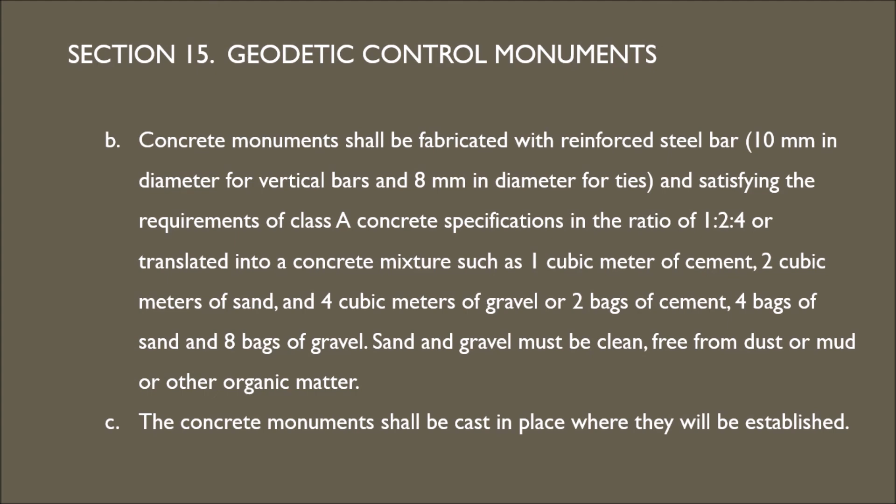Section 16, Markings of reference monuments. They shall be marked on top with engraved letters and shall consist of 5 parts, namely: provincial code, control point number, year established, order of accuracy, and office or entity that established the reference monument.

A. The list of provinces and their corresponding codes is found in Annex 4 of the Manual. NAMRIA shall be consulted for assignment of codes for newly created provinces.

C. The office or entity that established the control point shall be inscribed using only one word, which could either be an acronym, company name, or surname of a person.

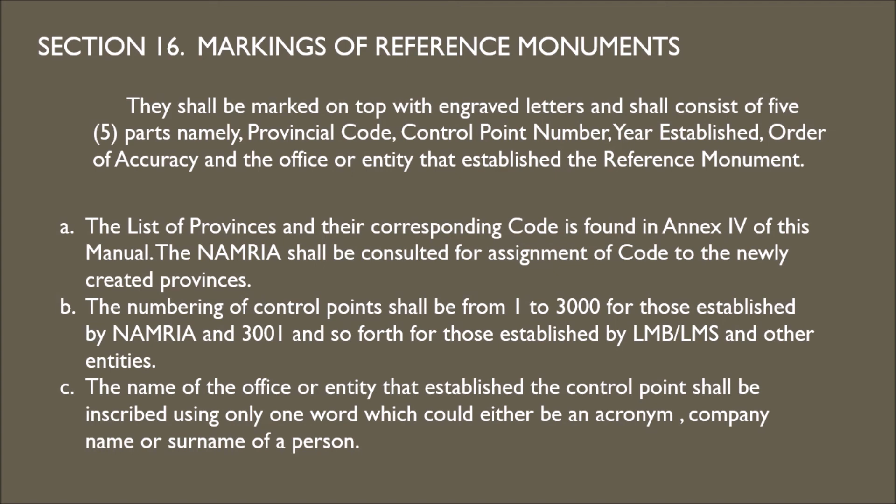D. To avoid duplication of numbers, the establishing entity shall coordinate with NAMRIA for first and second order control points, or with the concerned LMS regional office for third and fourth order control points. The LMS shall furnish the data to LMB on the established control points for the updating of the reference point national database.

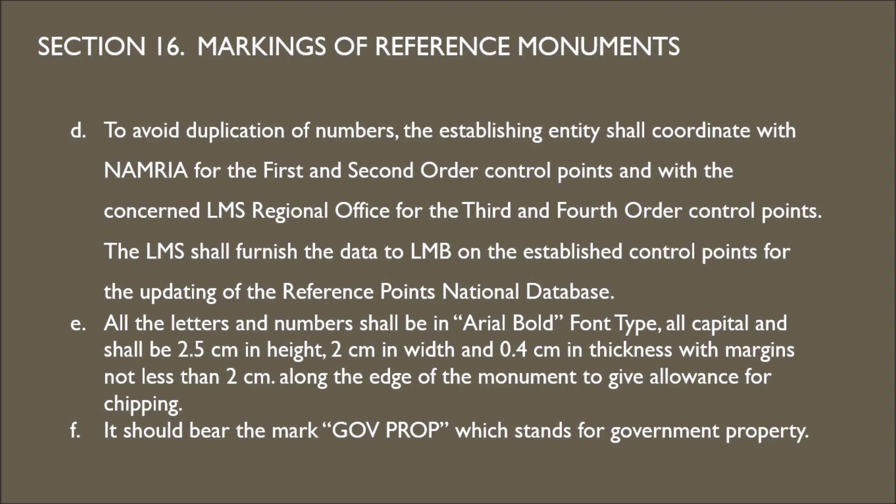E. Letters and numbers shall be Arial bold font type, all capital, and shall be 2.5 cm in height, 2 cm in width, and have a thickness with margins not less than 2 cm along the edge of the monument to allow for chipping. F. It shall bear the mark 'Gov Prop,' which stands for government property.

There is an annex listing the province codes.

Section 19. The establishment of geodetic control covering the first and second order accuracy shall be done only by GNSS receiver. There shall be at least 3 receiver units per survey team. The employment of more than 4 receivers is preferable.

Section 25, Connection to existing controls. The connections shall be made to controls of the same or higher order of accuracy, following the number of observations. There are tables showing the order to achieve, minimum observations, and recommended observations.

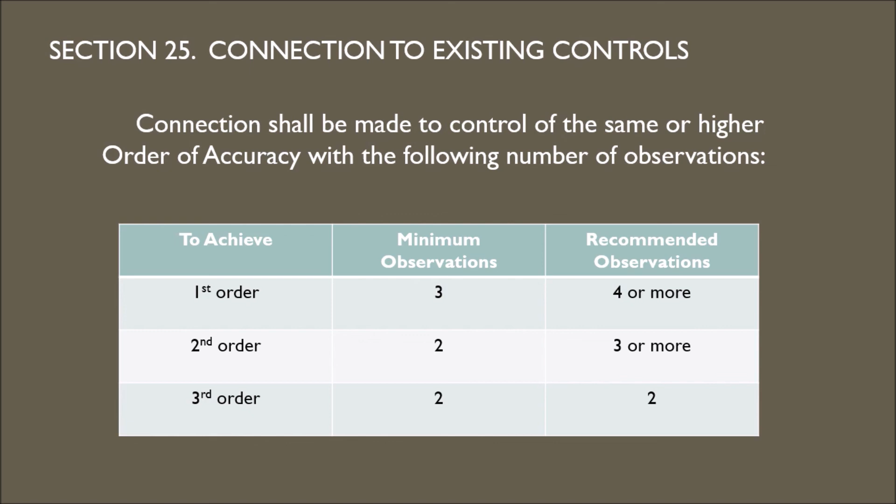For the first order, 3 is the minimum observations and 4 or more is recommended. For the second order, 2 is the minimum observation and 3 or more is recommended. For the third order, 2 is the minimum observations and 2 is the recommended observation.